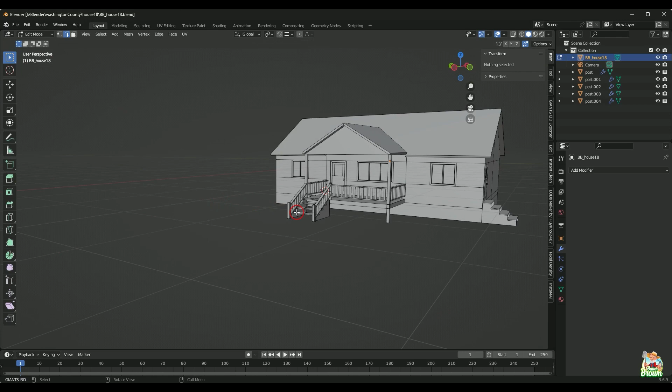So with any gutter or rain spout, first you need to pick out where you want it. You can see this model here is very simple, not done yet - I still need windows and stuff like that, but it's getting there. This is a very simple model. But you want to pick where you want it to go - this side of the house, or that side of the house. Maybe like on the back side, it can run along the entire edge.

But you need to pick where you want it. And in this case, I'm going to run it right on this left-hand side right here. I'm going to put one for now anyhow. And that's where I want it.

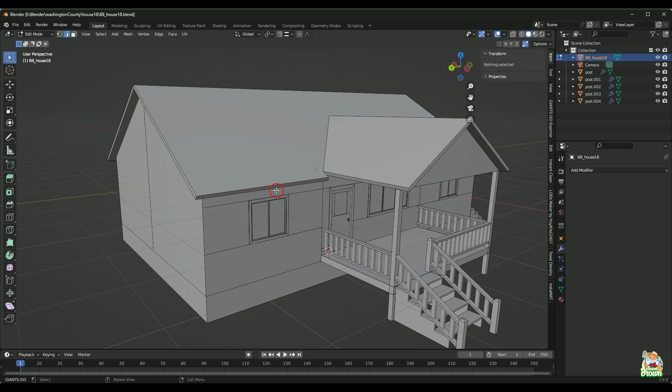So the very first thing I do is hit number 2 to get myself in edge select, and I'm going to pick the bottom edge of this roof trim here, because that's where I want that gutter to go - I want it to run right along that bottom edge. I'm going to hit Shift D to duplicate that edge, hit the letter X for X-ray to get on the X axis, and pull it away from the house just a little bit, like you see there.

And that is going to become the base for our gutter. I know it's kind of hard to visualize right now - how the hell is that going to become a gutter? But it will, trust me, we're going to get there.

So from here, I am going to hit P - P stands for, I don't know, it's separate. We're going to be separating this selection, so we'll hit the letter S for selection. So all we really did there is take that edge and separate it away from the main group.

So it's its own object. Let me tab over into object mode. I'm going to highlight that gutter. You can rename this if you get confused between which one is which, and you can rename that one to gutter if you want to.

From there, I'm going to right click and convert that to a curve. The reason we convert it to a curve is curves are much easier to work with. You can make twists and bends, and it's a whole lot easier than working with a solid piece of geometry, like trying to make a sweeping curve on a cylinder. The way we'd do that is via a curve, because it's just a lot easier to work with.

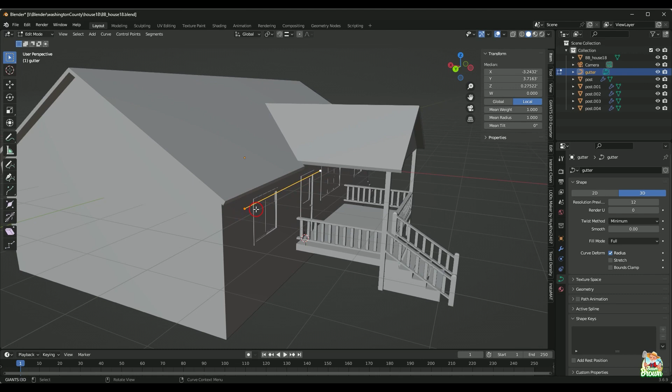Before I get that far, what I want to do is tab back over into edit mode. You can see we have two vertices on either end. I don't even know if these would be vertices. These would be more like the control points we'd normally use for a spline inside of a Giants editor, because we can utilize these to change that curve. We can move them and it would change this curve, but we're going to leave it straight because we want our gutter to be straight. But right now, if there's a step we need to make, and if we don't make this step, our gutter would come out sideways.

So I'm going to show you what it's going to look like right now. I'm not going to make this step yet, I'm going to show you what happens if we don't make this step. Actually, if you're following along with this video in order, maybe I should do that step now.

So what we're going to do is hit Control T for tilt, and we're going to hit a -90. So we're taking those control points and basically spinning them 90 degrees. Then I'm going to tab back into object mode.

Now I'm going to go back over into my object properties for my curve properties. The first thing I'm going to do, scrolling down here, is where it says fill mode. I'm going to hit that drop down list and click it to half. So what's going to happen is it's going to turn this into a cylinder, but instead of being a perfectly round cylinder, it's only going to be a half a cylinder now. I'll show you the difference this makes when we get a little further along.

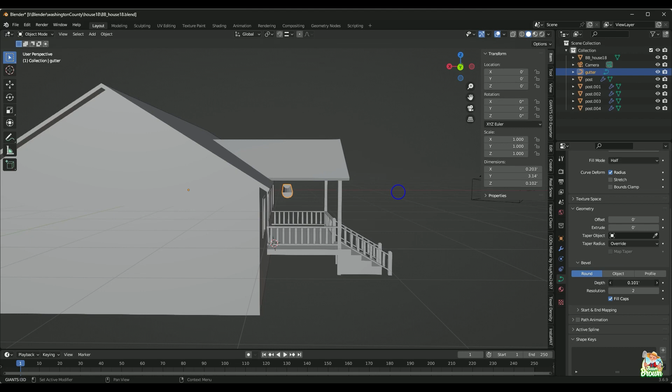And from there, we're just going to work on a depth. We're going to drag that depth out a little bit, drag that spout out just visually. There's no hard fast number we're going to be utilizing, we're just going to take a step back and see how that looks. Make it a little wider if you need to, a little skinnier if you need to. Then you can grab it using G, move it along the X axis, and tuck it back up under the lip of that roof.

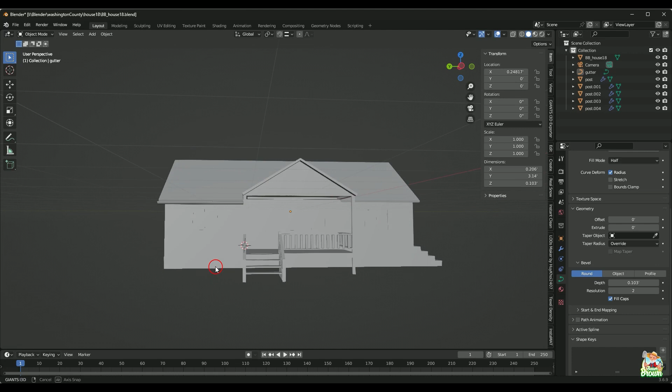So that's where you want it to sit. Then you can kind of see how it looks. I've done it already where it looked too clunky, too big and too fat, and it just looks weird. And I've already had it be too skinny. The one thing you could do is not apply anything we're going to be doing here, so if it doesn't look right, you can come back and change it.

All right, let me show you what these things do now that we have this selected. So we started out with this curve here, right? The first thing I was going to do is tab over to edit mode and show you how to move those control points. So Control T for tilt, and you can see what happened there is it spins that 90 degrees.

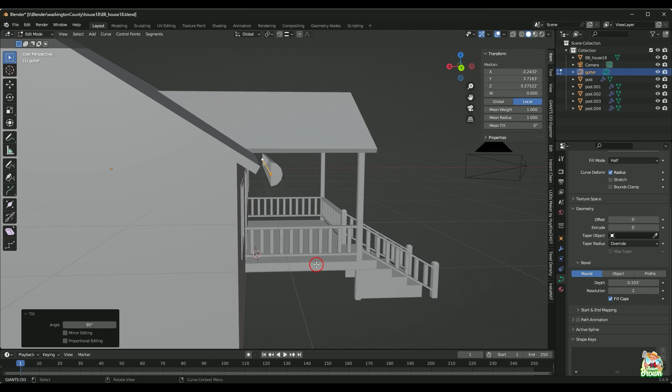So if you were to miss that step and you end up with a spout or gutter that looks something like this, well, that's what you did. You forgot that step where you need to spin that. Now if you didn't know about Control T for tilt, most of you are probably going to try to convert back over to a mesh and spin that on its y-axis to get that straightened out. Well, you don't need to do that. While you're in curve mode, that's what Control T does. So Control T, -90, and it spins it just like so.

Okay, so that's what that does. The fill caps, what that does is this is our end caps right there. You can see how we only have like half of a cylinder. By clicking on this, that would fill those caps in for us.

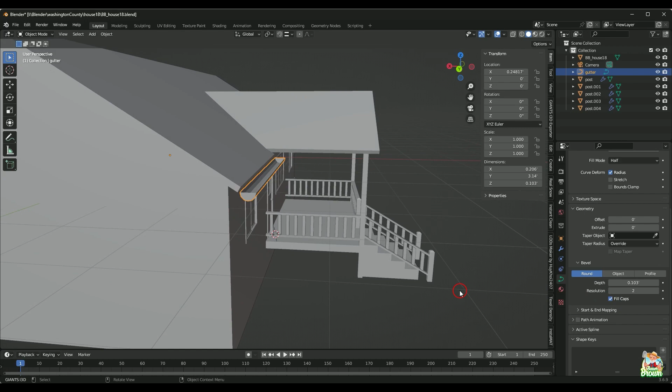Alrighty, and the last thing is our resolution. If you look underneath, by changing the resolution, you can see it just basically adds more cuts to it. Now it looks super duper smooth, right? And you can get it all the way down to the point where you have zero and it just looks like a triangle. You could even do that if you wanted to.

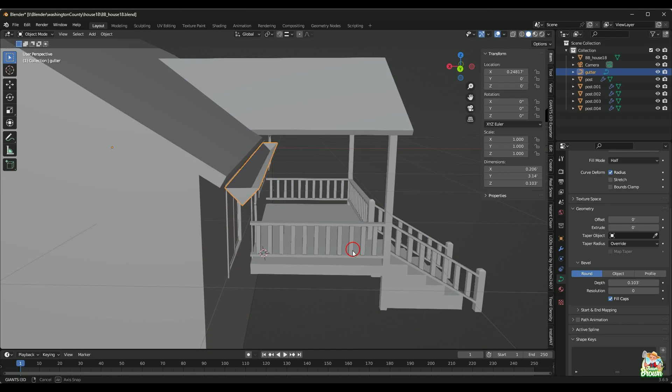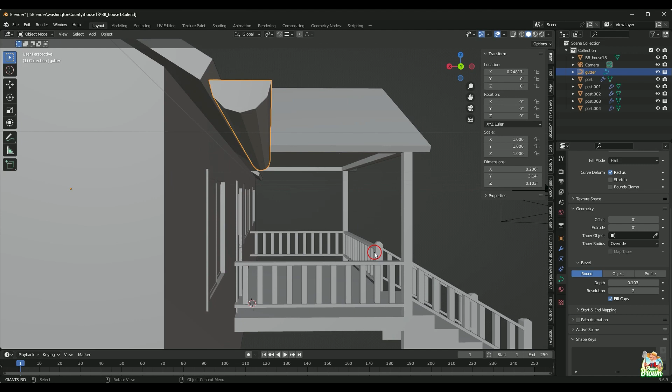That's kind of what I was talking about with giants. I think one is what they probably do. Actually, one doesn't look that bad either. I normally stick with two, but you can do one. One actually may be a better option. Yeah, one doesn't look that bad. I normally knock it down to two. Let's try one, because like I said, the whole name of the game here is to keep our poly count low. We don't want to be jacking it up with a bunch of extra polys that we don't need. But this is fine.

There's absolutely nothing wrong with what you have here. That would make a perfectly fine gutter, in my opinion. You just want to make sure that you don't have it too wide. That's what's going to throw you off. If you make this gutter too wide, it's just going to look funky. That one might need a little bit more thickness, maybe like so. And I'll pull that away from the house just a little bit. I think that looks okay.

Now, the only problem we have here with this gutter, is that a little too big? See, this is the way it goes with me, I get hung up on these things. Is it too big? Is it too small? And this is what I mean about not applying anything.

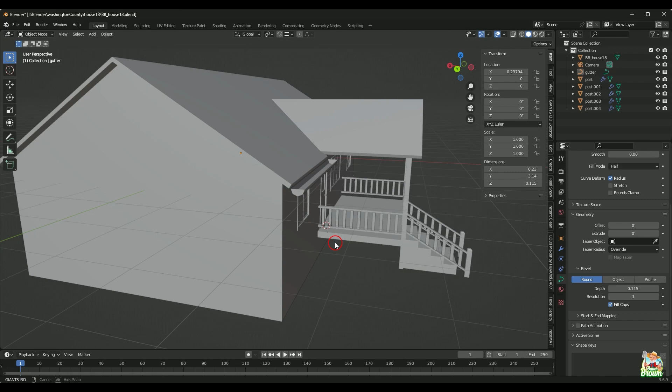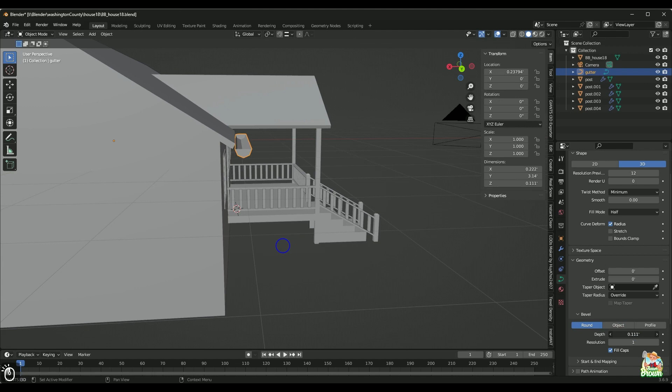If you leave things the way they are and you go back to work on the rest of the house, you can always come back to it and say, you know what, that does look a little bit too big. And you're still able to make changes at this point if you need to. So if I decided that was a little too big, I could always click back into it and just shrink that up a hair if I wanted to.

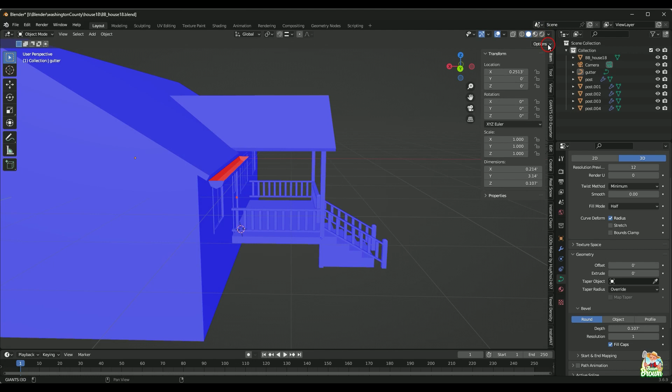Okay, so what I was about to tell you is the one problem we have with this right now is our normals. So if we look at this, what would that be? Like face normal, what would that be called? Face direction, basically. Face orientation is what it'd be called. I have mine mapped to alternate X so I can tab in and out of there pretty quickly.

But what you would want to do is go up to your overlay options and go down to face orientation and turn that on and off. But anyhow, if we were to look at this in game from the top down, maybe you're doing a flyover or something like that, you'll be able to see right through this gutter if you look at it from the top, and we don't want that, right?

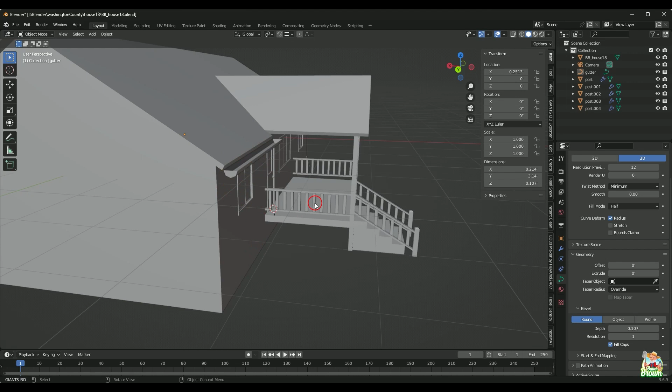So we want this to be a solid object and not be able to see through it. So the very next thing we're going to do is have this highlighted in object mode, and we're going to add a modifier to it, and we are going to solidify.

So we're going to go down to the solidify modifier, and there's nothing fancy we need to do. Get yourself in here so you can see what it did now, instead of what it looked like before. It just looked like a plane bent into a U shape. So when we add our solidify modifier, it gave it edges, basically. It gave it some thickness.

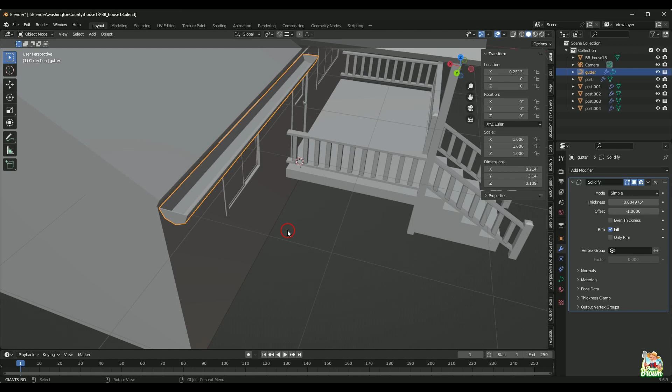Speaking of thickness, we're going to go over to our properties on our modifier and drag that thickness box down somewhere in there. This isn't as much for the visual, so you can see the thickness on the gutter — it's just so you can't see through it, basically. If you feel like it looks better by giving it more thickness, I tend to keep mine pretty skinny, but if you think it looks better, you can give it a little more thickness, and that's fine.

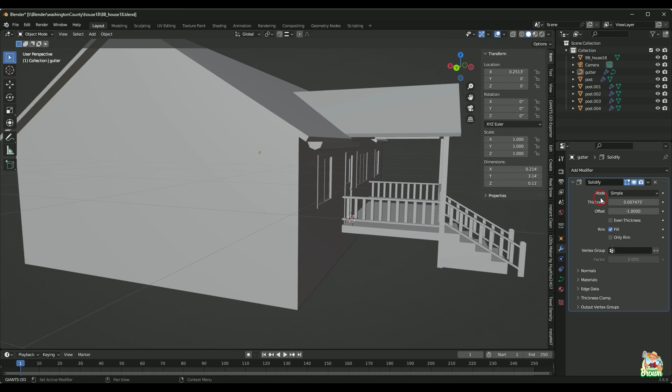That gutter right there is pretty well done. Now, like I said, I suggest you keep working on other aspects of the house, and if you feel like you need to, nothing is set in stone yet — you can come back and change that. But I'm going to show you how to keep going once you make it past that point and you do want to have it all finished up.

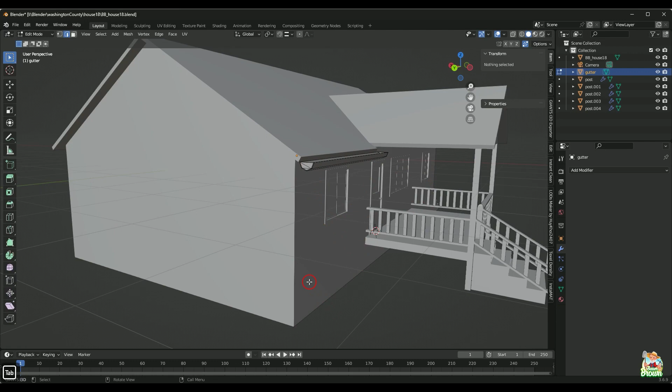So from here, you can either apply your modifier, or what I do is just convert it back over to a mesh. Once you convert it back to a mesh, it automatically applies that modifier and you don't have to worry about it. So that part is done — it's now a mesh that we can utilize like any one of the other parts of our house.

Okay, so the next step is our downspout. We want to get a downspout in here. So I'm going to tab over to vertices select mode, and I'm going to grab this vertex right here on the bottom, the one that's dead in the middle. So I'm going to grab that, and we're going to go through basically the same process again.

I'm going to Shift D to duplicate, and drag that along the Y-axis, moving it over right into position where I want that downspout to be. All right, right there looks about right. That looks pretty good.

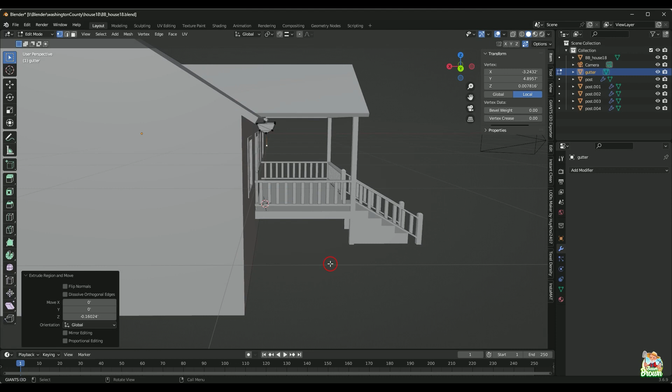I'm going to hit E to extrude, then Z for the Z-axis because I want to pull it down, and I'm not going too far. Once you pull it down, if you decide it's not far enough, you don't need to extrude again — you can just grab it and pull it a little bit further down. I guess right there should be okay.

So we're going to extrude again — E for extrude, this time X for the X-axis — and bring it back in towards that wall, like so. Don't bring it right up to the wall; give yourself some room because we're going to be making a cylinder out of this. Now, this hard 90 doesn't look good — no downspouts look like that, so we want to give it a little bit of a taper.

So we're just going to grab that with G, Z for the Z-axis, and pull that down, maybe 45 degrees, somewhere in that area is fine. Then E to extrude again, Z for the Z-axis, bringing that down towards the bottom, and we're going to give it one more bend — E to extrude, X for the X-axis, pull that out a little bit, grab it one more time, and pull it down on the Z-axis like so. Okay, so you should have something like what you see there.

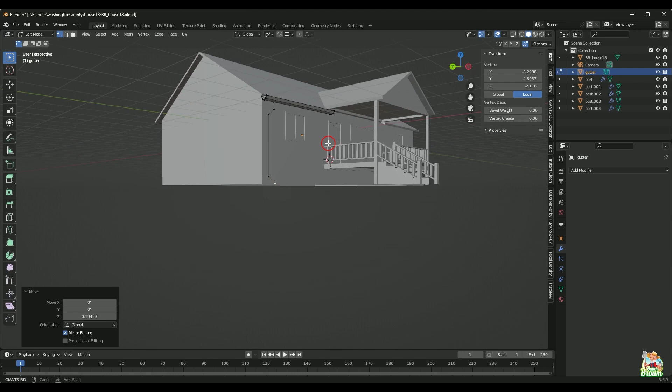Okay, and you can move any one of these around. If it doesn't look quite right, you can grab any one of these points and move it into a better position. That's not a problem.

All right, so everywhere it makes a curve, this point here, this point here, and this point here, I want to give that a little bit of a bevel so it doesn't look so sharp. You don't want that sharp of a corner there.

So this isn't like working with a face where we hit Control B to bevel. We have to hit Shift Control B because we're beveling vertices. We just pull that away like so. It works the same otherwise.

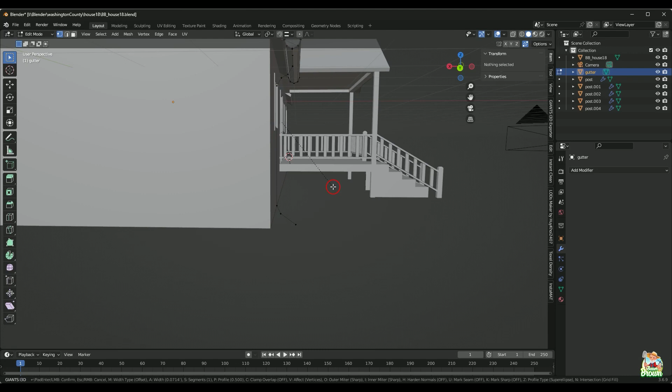So the scroll wheel lets you add more cuts or take away cuts if you want to. But like I said, I'm trying to keep this low poly, so I'm not going to add too many cuts. One extra one is fine. So something like that should look pretty good.

From here, it doesn't matter how you do it, you want to select this whole piece here. You can drag down and select all of them, but you need that top one also. Normally what I do is go into 2 for edge select, grab the top one, and then using Control, click on the bottom one, and that highlights the whole thing.

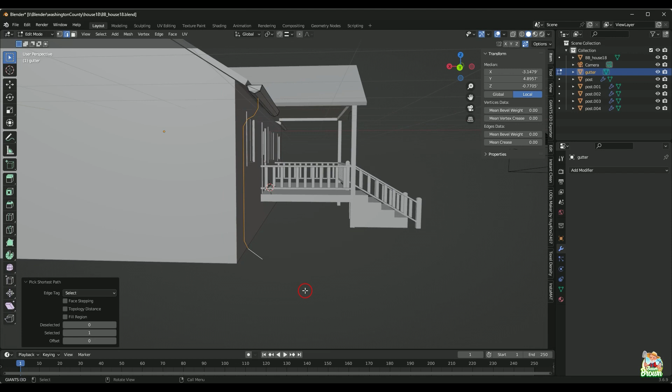And we're going to hit P for separate. P for separate, S for selection, and that just broke that away from the rest of the group, made it into its own object.

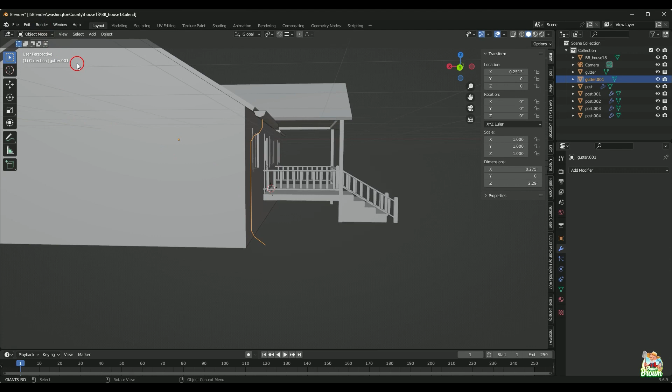And from there, like I said, we want to get into object mode, we want to be in object mode like we are now. Now, the only thing that's different here is we don't have to go into edit mode. Once we convert it to a curve, we don't have to go into edit mode and spin any of those control points. So let's right click, convert it to a curve.

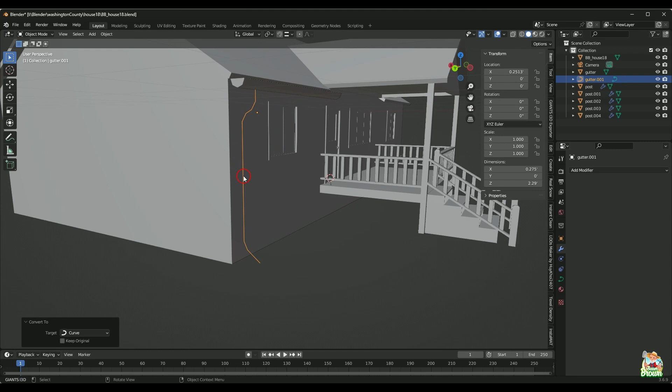With the gutter, at this point we tabbed into edit mode and spun all of these control points, and we don't need to do that here. This is going to be round, completely round, so it doesn't matter.

So stay in object mode, go back over here to your curve properties. We don't need, for this one, we don't need -- this fill mode can stay on full because that's going to allow this to be completely round instead of just a half.

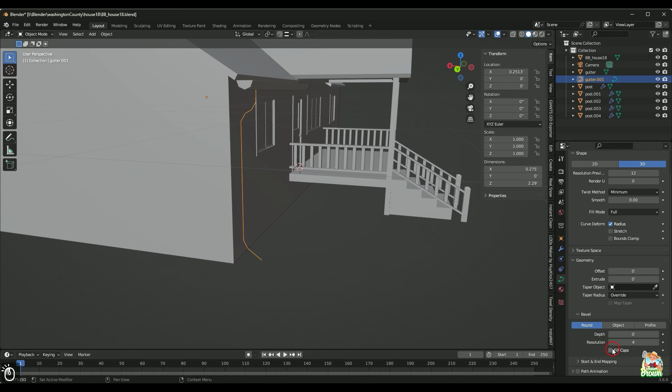And you do need to click on fill caps, because if you do, that's going to plug up the end of your downspout, and then your water is going to have no place to go, which is going to back up inside of there. Not really what you want.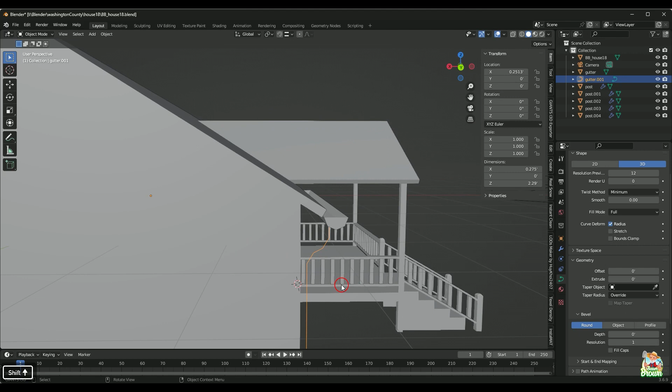So from here, to resolution, I guess we'll do one, we'll see what this looks like on one. Because like I said, my spouts I did, every one of them I do on two, but this looks absolutely fine. So I think I've been adding extra geometry when I really didn't need to. All right, so let's try one, see what that looks like.

All we really need to do from here is just grab this depth and start pulling it out. Now, the way that I normally do this is I'll zoom into the bottom of my spout, and I'm kind of utilizing these two side edges here. You can see we got 1, 2, 3. I'm using these two outer ones because I want my spout to be about as wide as that.

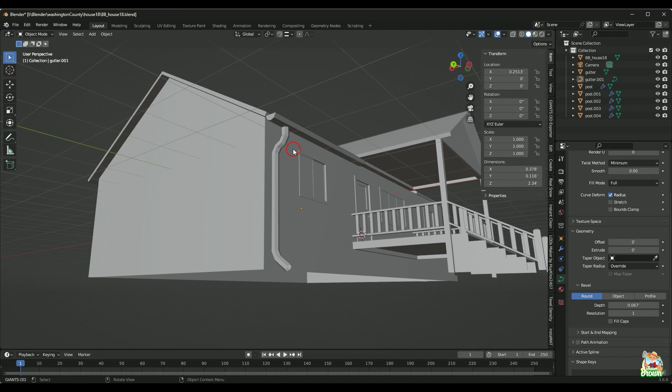So I'm using the depth here, and I'm going to pull that out, not going any further than those two edges, and see how that looks. Now, this is the way that I did it with the resolution at 2, because my lines were in different places. So that looks kind of, I don't know.

It looks okay, but it looks a little clunky. To me it looks a little big, doesn't it? Does it like match the rest of it proportionally? Does it match the house?

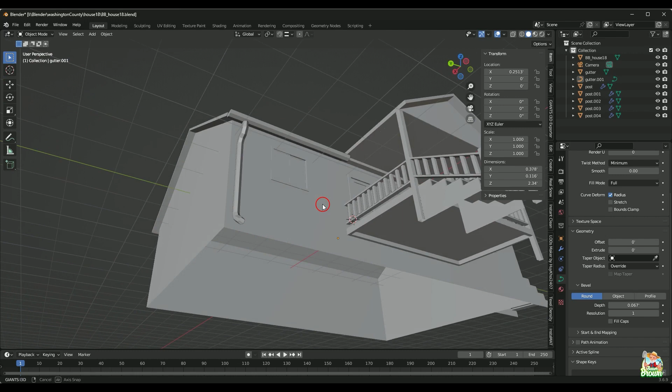And you can measure this, you can use measure tools if you want to see how big things are, to make sure you're not making like a 12-inch rain spout. I don't know, I mean that looks okay. I normally do things visually. As long as the house is set properly, it'll look okay.

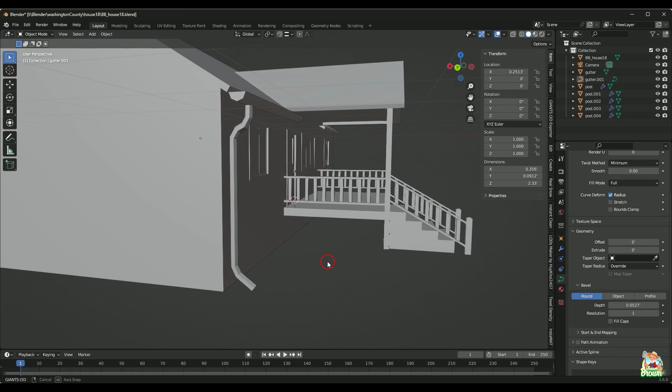Maybe I'll bring that in just a little bit more on the downspout so it doesn't look so thick. That was throwing me off there. Yeah, that looks better, this way it doesn't look so thick and bulky. All right, yeah, I'm so used to having my resolution on 2, and you can see what happens just bumping that back up to 2.

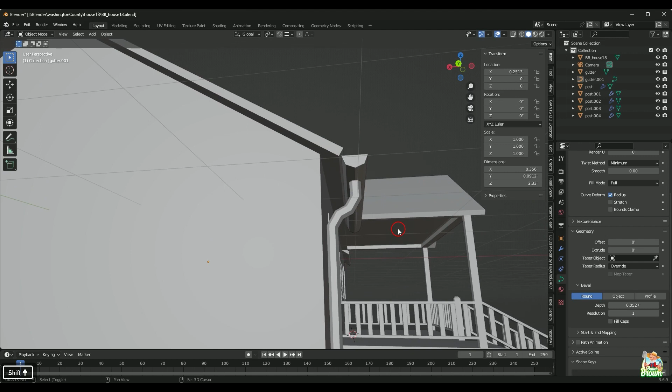All right, didn't make that much of a difference from what we have here between 1 and 2. I'm okay with 1, we'll keep it there. But on my gutter up there, it made a difference because the lines I was using to line up where I want that downspout to be had an extra set of lines in there because of the resolution. But anyhow, we've got one more step we want to make here.

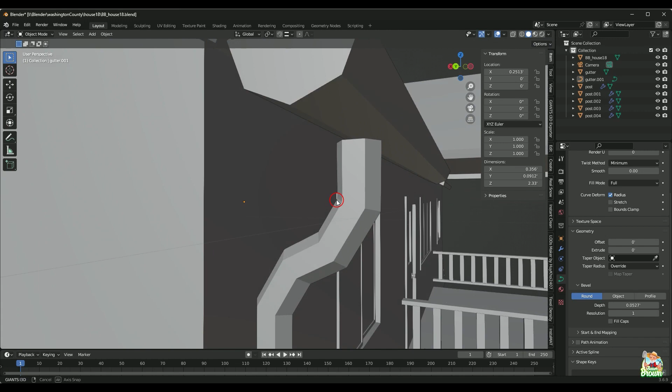If you look at the very top of the downspout here, it does not connect all the way with ours. Oh, this might make a difference here. Maybe that's why I was using 2. Let's see what happens here. You can see that it doesn't connect.

What you want to do is select that, get yourself into edit mode, and grab that very top control point. You want to hit G to grab it because we're going to move it. Actually, let me escape out of there, I want to look at this from the top view. You want to hit G to grab it, and you're going to move it upwards, so we're going to hit Z for the Z axis. I'm just going to pull that upwards until I can see it starting to poke through the top there.

Oh yeah, it doesn't look bad. That's fine, absolutely fine. And that's the whole point there, is that you can manipulate any one of these, right?

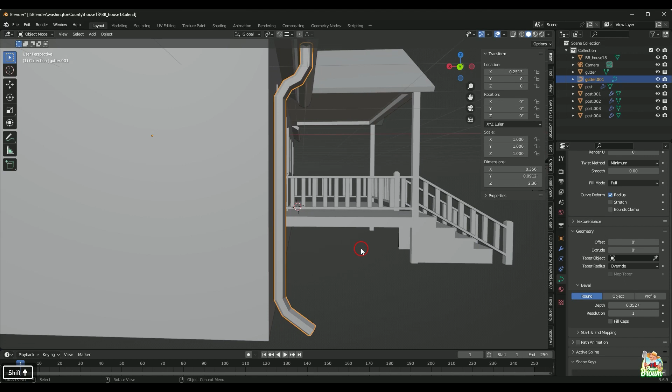So when you're in edit mode, if for some reason this downspout is either too far away from the wall or maybe it's too close to the wall, you can grab your control points here. So maybe it needs to go closer to the wall. You can hit G to grab it, X for the X axis, and you can tuck that in closer, or you can pull it further away. You can manipulate these any way you want.

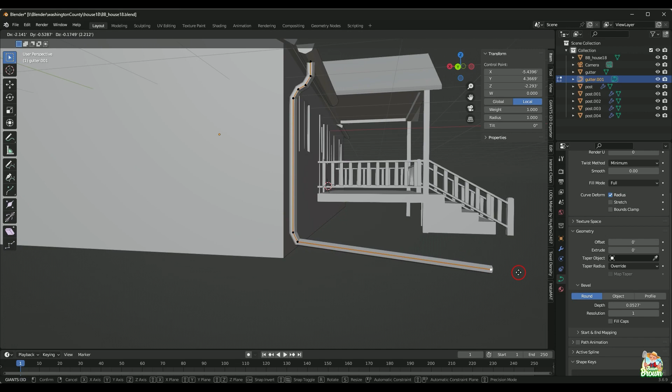That's why I recommend keeping these the way it is, not committing any of your changes until you're completely satisfied. Like I said, you can grab any of these. Maybe you need to shorten up your spout, or you may need to make it longer, or what have you. But you can control any one of these, you can manipulate any one of these control points to tailor it to your needs, to fine tune it, so to speak. But I think that looks good the way that it is, so we're going to keep it right there.

Now I'm just going to zoom into the bottom of this spout, and I'm going to add that solidify modifier on it. Go to solidify, and whoa, that is pretty thick. All right, so we're just going to drag that out like so, and that's fine. Like I said, I don't shoot for anything too thick because I'm not going for the visual aspect of it. I don't want to necessarily see the thickness, I just don't want to be able to see through the spout.

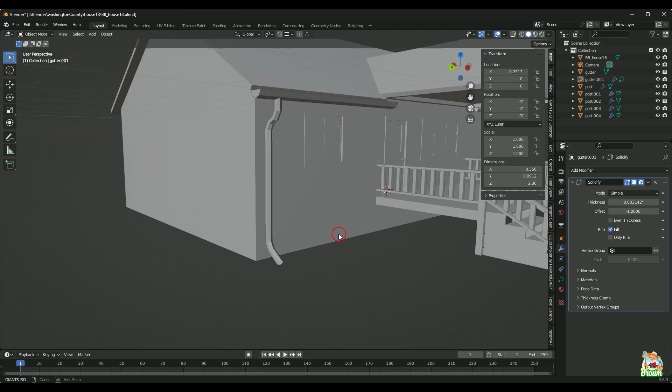Not that big of a deal, I know, and for you maybe it's not that big of a deal, and you can skip that step, right? So you don't have to add that solidify if you're okay being able to see through it. Like, how many people in game are going to be able to see down through the top of your rain spout? None, really, unless they're flying around for some reason, and that's if they even notice. So this is kind of a nitpicky detail, whether or not you want to do that.

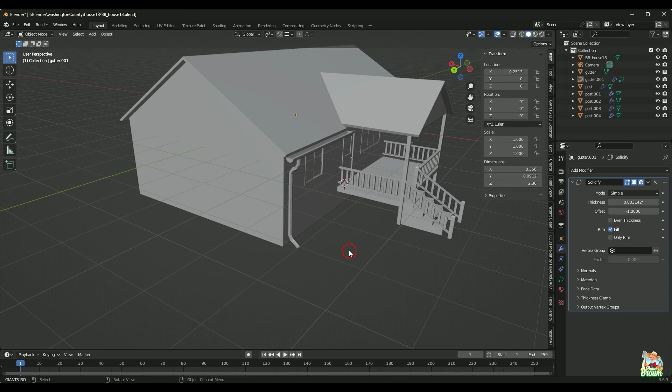Like I said, from here, if I was to look at it, this would be highlighted red and I'd be able to see through that in game, and for some of you guys that may not be a big deal. I'm a little OCD, a little anal retentive when it comes to some things like that, so I just make it solid and that's the end of it. It doesn't hurt to add it - I mean for the gutter and the spout it actually doubles the geometry, but the geometry wasn't much to begin with, so I don't really worry about it. That's going to be a judgment call that you make.

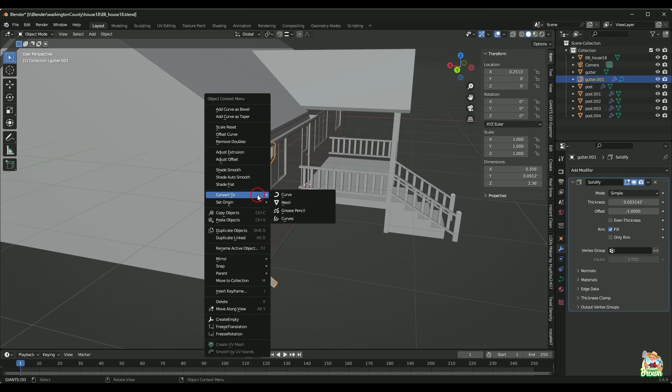All right, from here we're going to highlight this spout here. Did we convert it yet? No, we did not, so let's right click, convert it back to a mesh. And then we want to join this back into the main house, so we're going to join them all together. Now, the way that you join these - we're going to use Control J to join - but the order that you join them makes a difference. I don't want to say the order that you join them, it's the order that you select them, right?

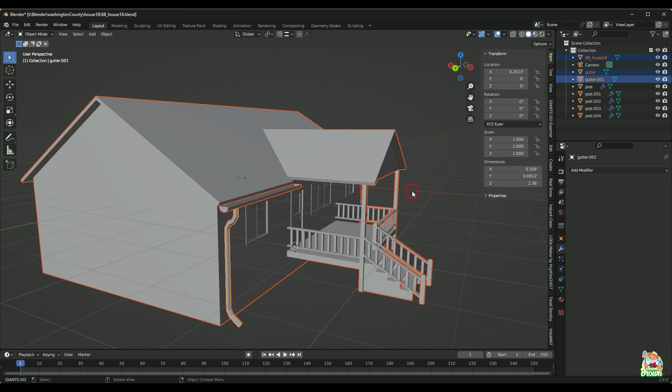So if I select the house and hit shift so I can select multiple, and then select the gutter and the downspout, what that's going to do is join everything to the very last thing that you selected. So the order that I just selected these in, it's going to join everything as part of the gutter.

Not a big deal, it doesn't matter. It's just going to make it into one object, but you'll have to rename it. So if you went through, like you can see I have house 18, maybe I'm just that lazy and don't want to rename that one. All I'm trying to say is the order makes a difference, so pick whatever you want this to be a part of.

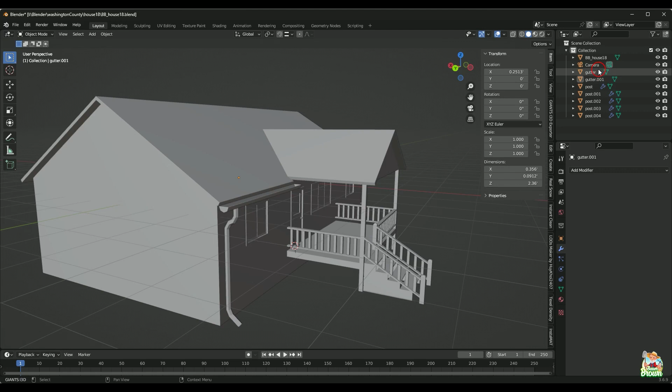So I want to join this gutter, the downspout and the gutter, to the house. I'm going to pick this downspout first, then the gutter, and lastly the house because that's what I want to join it to. Then I hit Control J, and now everything is part of that house.

If you would have got them out of order, the only thing that would have happened is you would have joined the house to the gutter. So instead of having 'house' up here, it would now say 'gutter,' and you'd have to rename that. Really not a big deal, just wanted to get the point across that order of selection does matter.

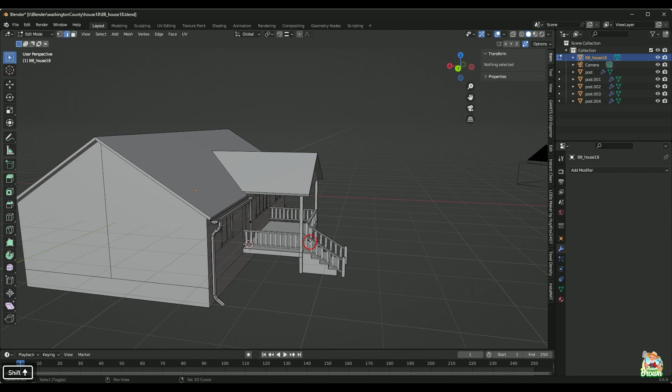Okay, and there you have it. Now that is how I do my gutters and my downspouts.

I had some of you guys ask me how I do mine, and I tried to explain it through the comment section, which wasn't the easiest thing in the world. So hopefully showing you visually through video was a lot easier to follow along with on how I do the gutters.

Okay, and that's it. Like I said, I do them the same way every time. It's simple, once you get the hang of it, just follow along with the video once or twice. Then after a few times, you'll have it memorized and you'll be pounding out rain spouts in no time flat.

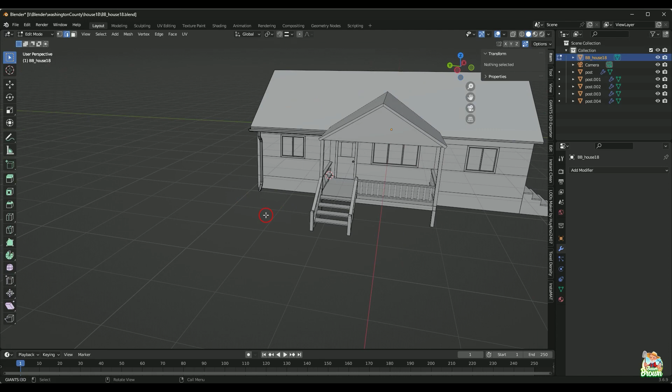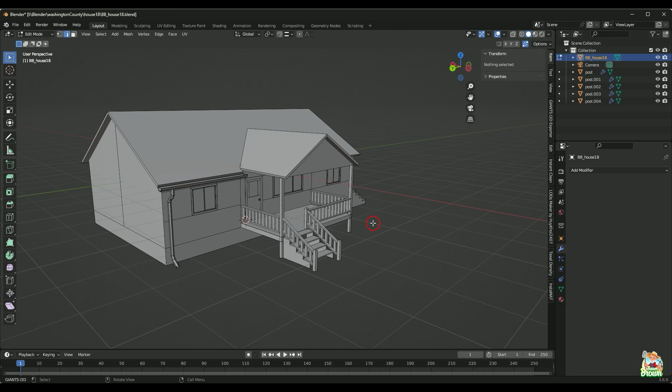Alrighty, so some things you can look forward to. I had a couple of you guys ask me if I can show you how to make houses and garages again. We did do a garage, a very simple one, but I think for one of these videos it'll be kind of like a let's-build, taking you through the entire process of how I make one of these structures.

Now, I have a lot of different ones, like this is just house number 18. I think 16 was the last one I did here. You can see there's a lot in here, these are all models for the new map by the way. This is the last one I just did, and this is actually the second time I'm shooting this video. The first time, we made downspouts and gutters for this house here.

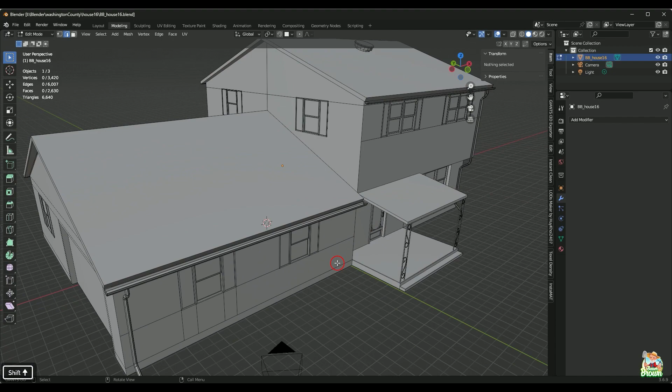All right, so all of my houses look different, and the reason they look different is because they're based on a real life location. I've been using Google Earth or Google Maps, going through Street View, and remodeling the actual houses that are in the area, because I want everything to look true to life, and how much truer can you get than the actual house that belongs there?

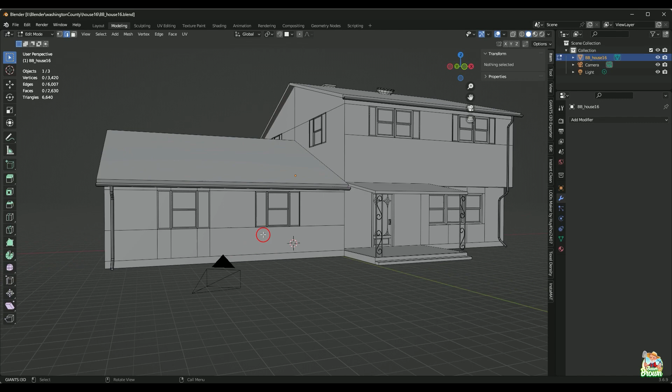So that's what I'm going to show you, how I do that. There are specific add-ons that I use to help me along, they're not necessary, but there's things I do, like reference images and stuff like that, and I'm going to show you how to do that. I'll take you through the whole process and show you how I make my houses and garages, all the way up to unwrapping, texturing, rain spouts, the whole 9 yards.

All right, and that's where I'm going to leave it. So that is my method for making gutters and rain spouts.

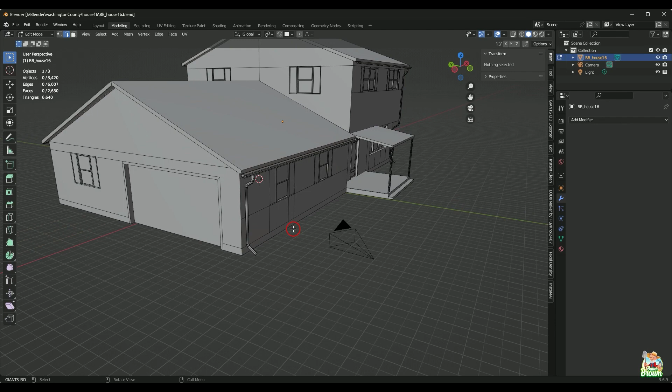I know, yeah, you lived your entire life just for this point where Bauer shows you how to make a rain spout. This is what my life has become.

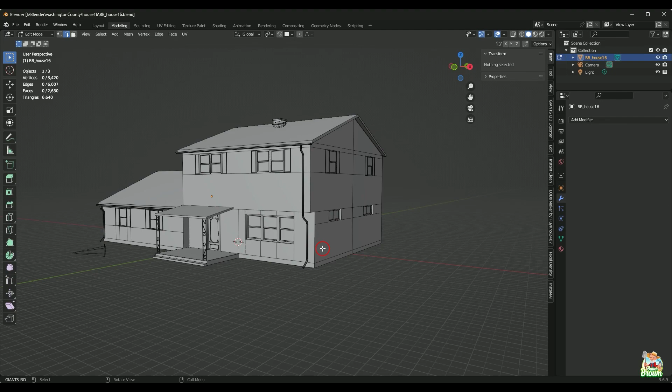Anyhow, very useful to have. Like I said, when you do enough of these houses, or whether it's a placeable, you need them. It adds that little bit of aesthetic to your house. So that's it, I hope you enjoy it, I hope it comes in really handy for your future projects.